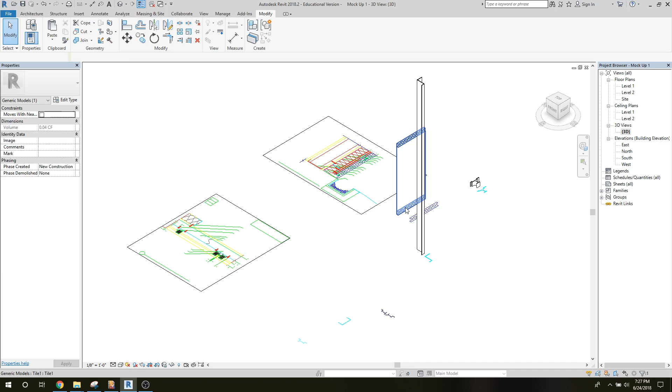Let's start making a wall to place our terracotta tile and assembly system on. We'll work in the same drawing. I'll get rid of all of our elements that we've created in place, and we'll go to level 1 so we can get rid of these other parts and pieces.

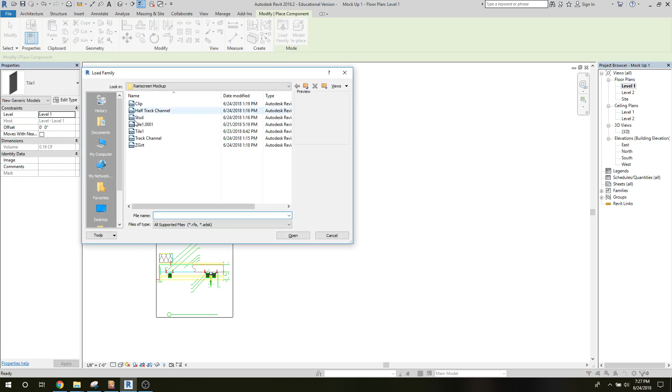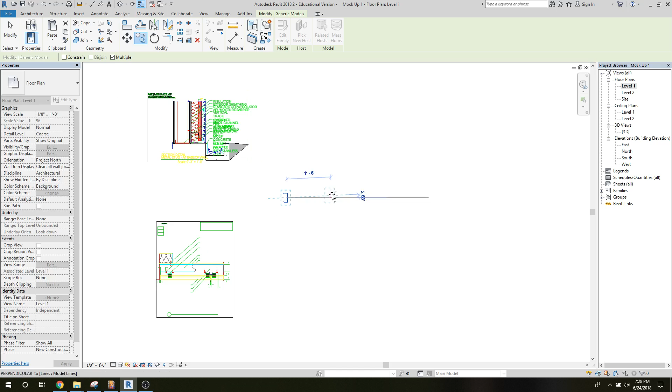Let's insert a component, place a component, and load a family. We're going to pull in the stud we made and place it. I'll use the copy tool to make some repeating elements, set it to multiple, and put this at 2 foot on center.

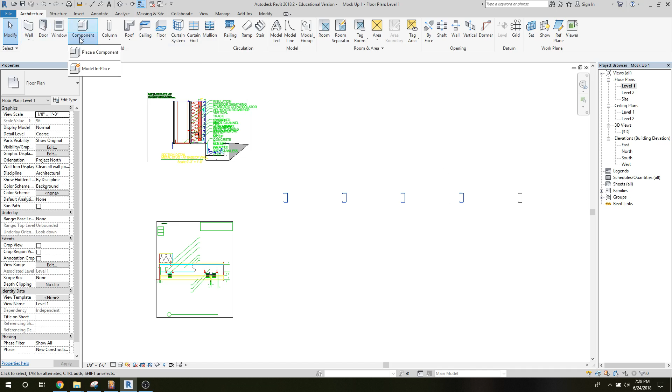Okay, then we need a sheathing, so we'll do a model in place. We'll leave that as a generic model for now and assign properties to it later on—this will help us move through this a little faster. We're going to make an extrusion.

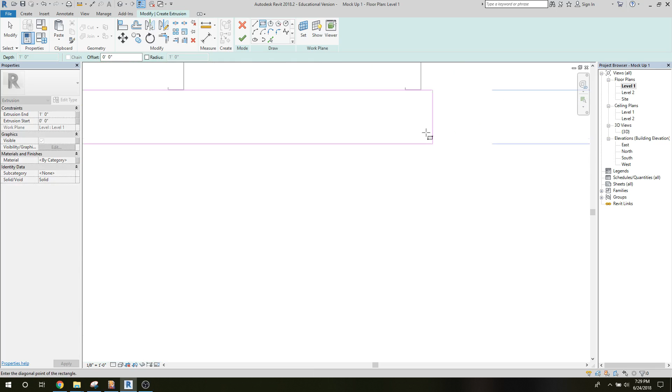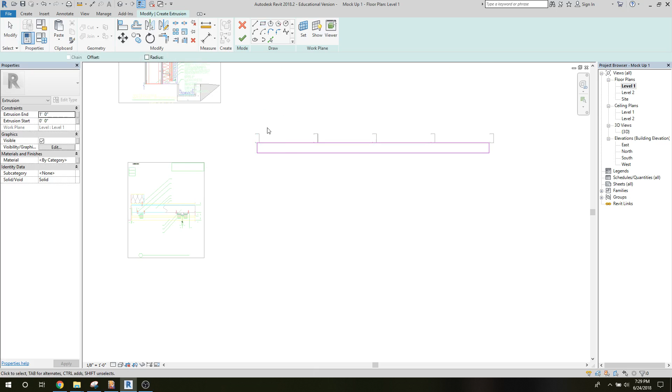We'll start as a rectangle shape. I can't get exactly the end of that, so we'll try to come up with something a half inch, but I'm not sure I can get in close enough, so we'll leave it. Element is too small for the screen—wouldn't that just aggravate you? Let's try that again, I'll draw it real quick and then correct it. We want that to be a half inch. I must have done something wrong there.

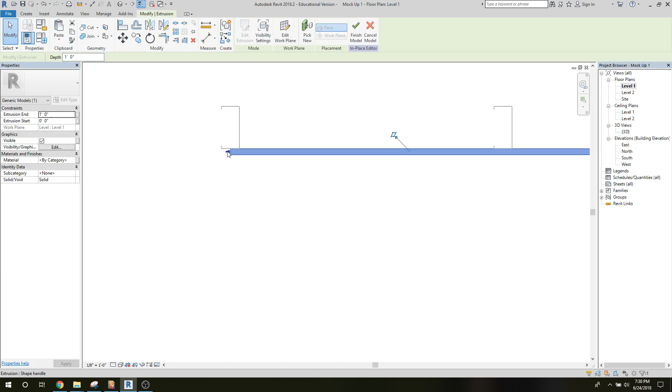We'll come in and complete that. I'll drag these out to the edges—not really critical, just trying to get the board to line up a little neater.

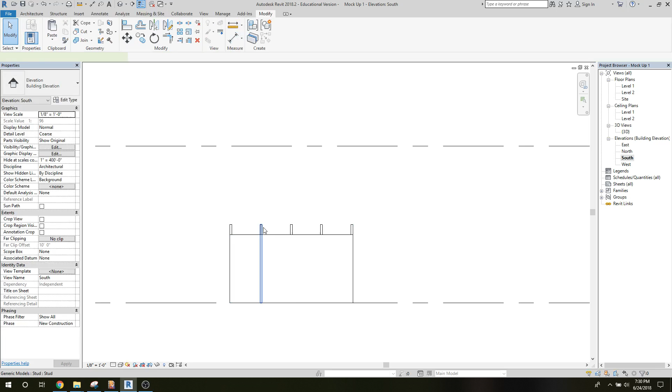We'll take a look at this in the south elevation and need to bring this up. Actually, that wall is only 5 foot tall, so let's make an adjustment right away. I'll finish modeling now and go ahead and edit the length of the stud. We'll edit that family, go out to the stud, select it, and make it 20 feet long.

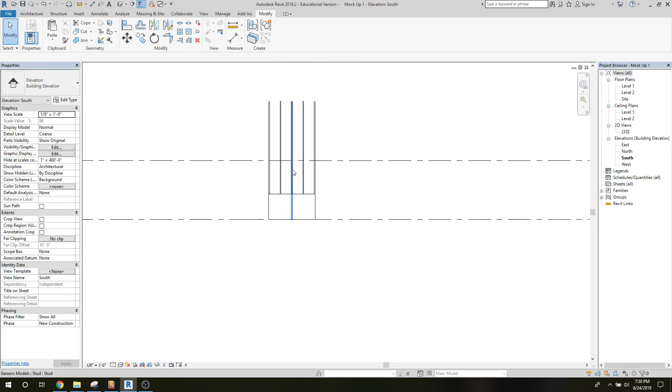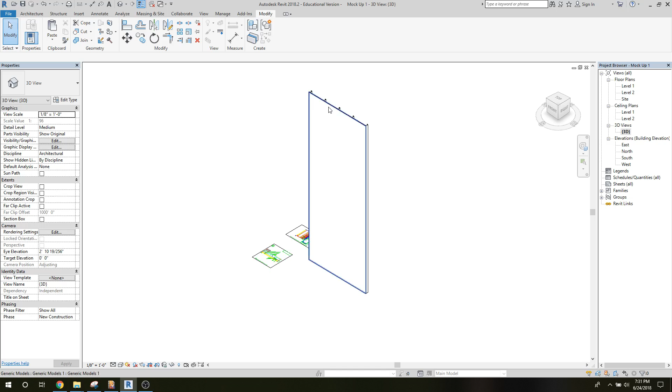Wow, did I say 20 feet? We'll pull that up—we may not want to use all of that, but that's our start. So now we have a stud wall, and I'm not understanding why I'm seeing those lines there. You shouldn't see those lines—it's just a redraw issue. We've now constructed what could be a plywood or waterproof gypsum sheathing on top of our studding.

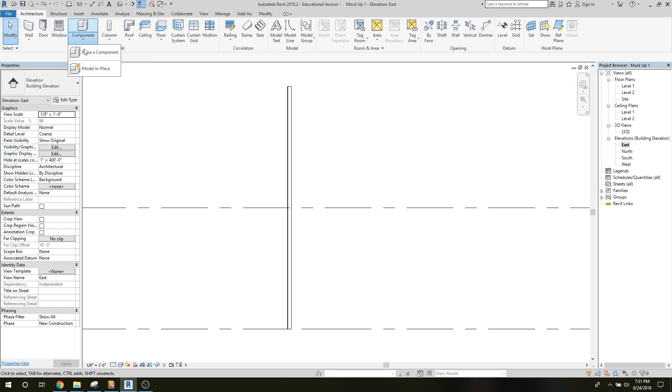Let's go ahead and look at putting the Z channels on. I'll go to the east elevation, so now we're looking at the side of the wall, and we're going to add our Z girts. I'll go back to place a component, load this in, and grab our Z girt—but it's not letting us place it in this view. Let me see if it might be because of the orientation.

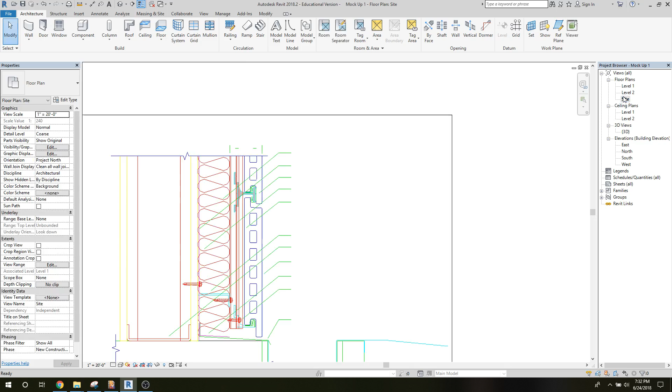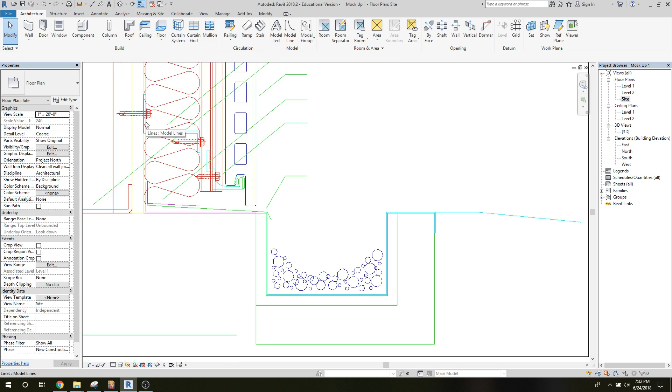This is very interesting. Let's see what happens when we try to place our Z girt the other way—yeah, it lets us do it, but you'll notice it's in the wrong orientation. So let's make some adjustments right away. It's going vertical, we want it horizontal. If we look at the section view of our Z, you'll notice the larger piece of the channel moves up onto the face of the wall.

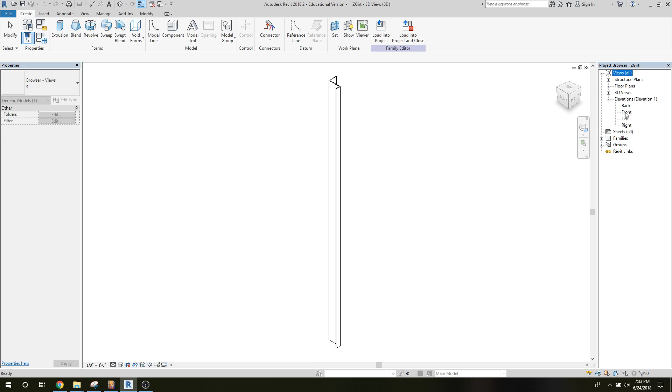So let's make all the changes to that shape. We'll rotate it counterclockwise, then rotate it from an end view clockwise, and see how we do with that. We'll edit the family, go to a view—let's go to a... I've never seen these presented that way. Let's go to the front view, select it, and rotate it.

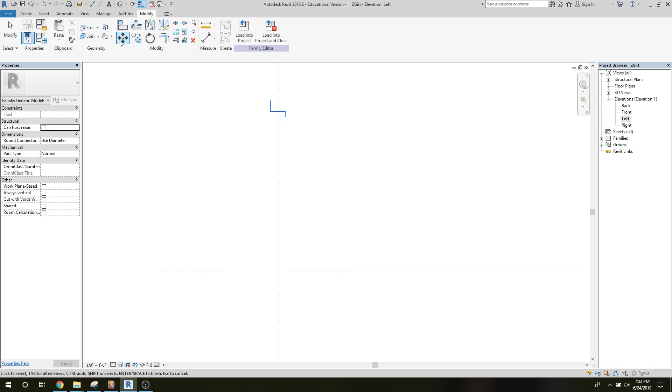Then we'll go to a side view of it and rotate it again. Let's put it in position, right at the origin, and load that back into the project to see how that works.

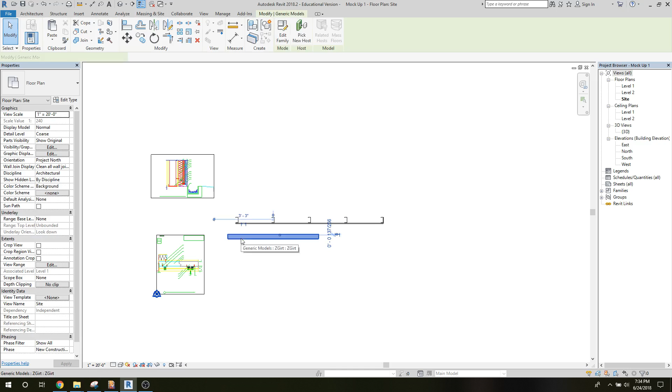Our wall is 4 bays of 2 feet, so it's 8 feet. Let's modify our Z-girt so it's 8 feet long—it was 5, now we'll make that 8. And let's try to move it into the center.

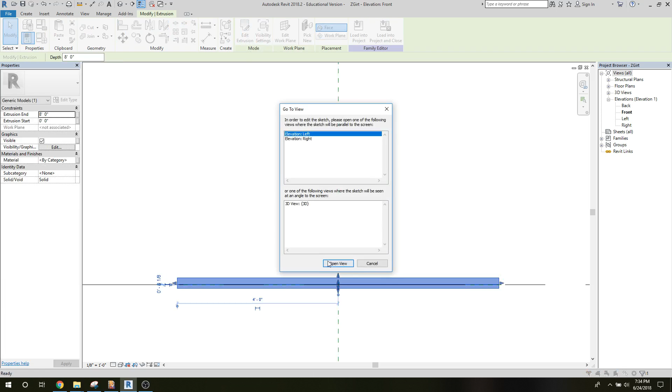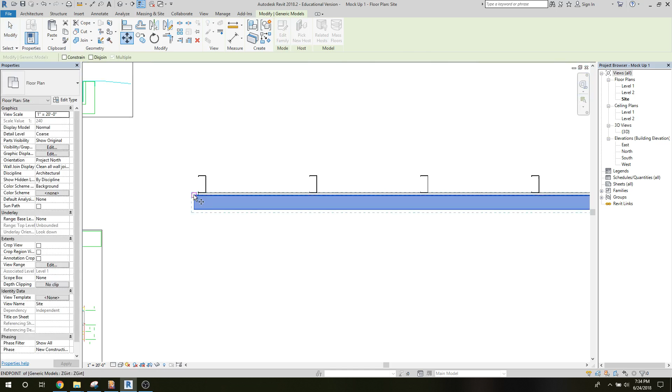Then load that into the project and try to move that into place. We should be just a little bit longer, so we'll correct that—actually, I'll correct it right now. It's got to be the thickness of that stud, so let's make it at least 8 foot, roughly 8 foot 2. I'll grab it again.

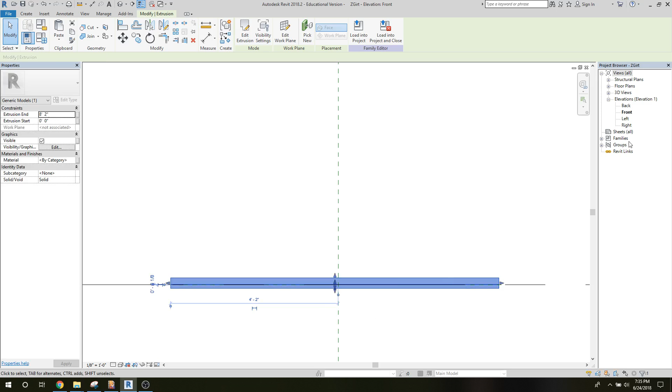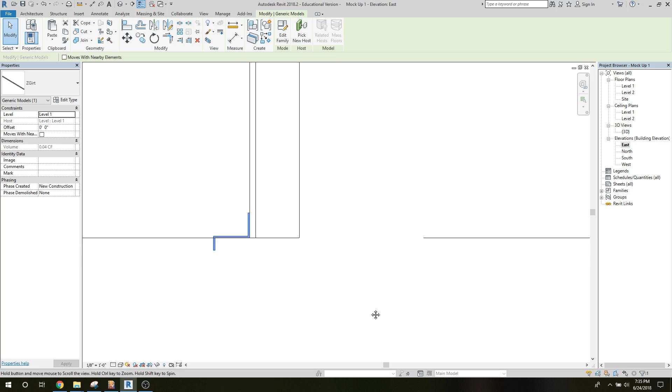That's just to make it look a little neater. Move it over. Now we've got to get multiple copies of this in the elevation, so we'll go to the elevation. We're sitting right there at the bottom—let's move that up so it's flush to the very bottom. Then let's put our Z-girts on the building at 2 foot on center. We probably should do this in a multiple function, but I'm not really good with arrays, so we're just going to do it in multiple copies.

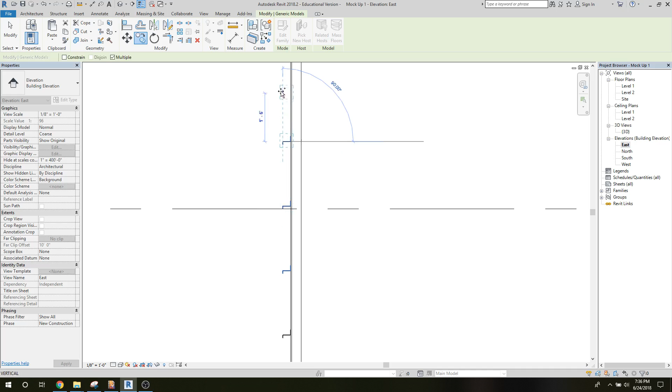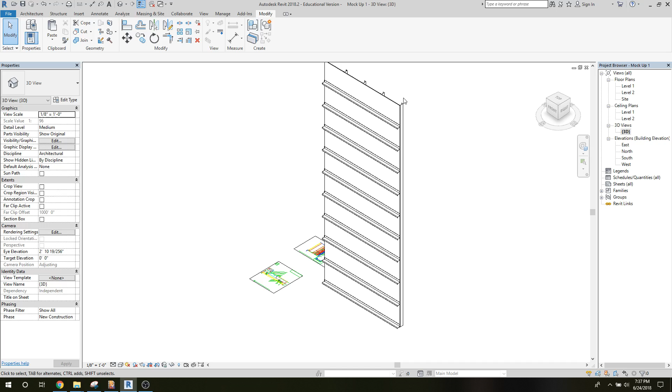Whoops, lost my copy tool. Okay, we'll take a look at that in 3D view now. So now we have our basic substrate construction of our wall—our Z-girts to accept our tracks, our substrate, and our framed wall. We'll end this clip here, and next we'll go back and look at putting in the vertical channels, or the tracks.